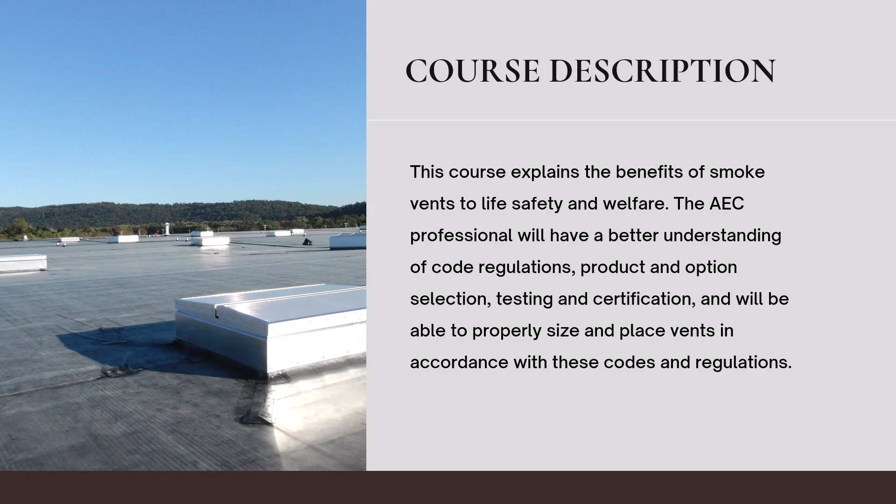The intent of this course is to explain the benefits of smoke vent design and life safety. Upon completion of this course, the designer will have a better understanding of the code regulations for life safety and will be able to properly size and place vents in accordance with codes. There are 5 learning objectives for this course. The first will be to be able to describe smoke venting application and why it's important to life safety. The second, we will illustrate smoke vent fundamentals, including the opening and closing options.

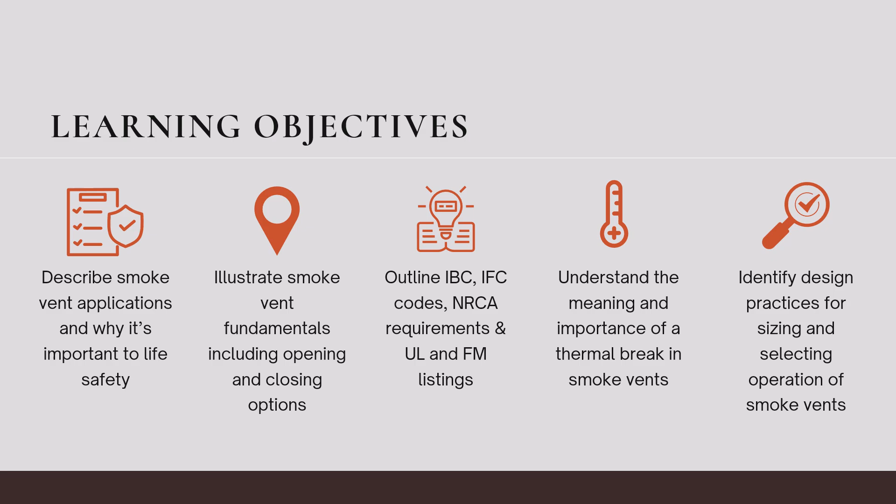Number 3, we'll outline IBC, IFC codes, as well as NRCA requirements and UL and FM listings. Number 4 will help you to understand the meaning and importance of a thermal break in a smoke vent. And lastly, we'll identify design practices for sizing and selecting operation of smoke vents.

So with that, let's start with section 1. In section 1, we're going to describe smoke vent applications and why it's important to life safety. Smoke vents are designed to open automatically to provide emergency smoke, heat, and gas ventilation from a burning building. Smoke vents save lives. The removal of smoke, heat, and toxic gases are critical to allow more time and improved visibility for occupants to exit a building.

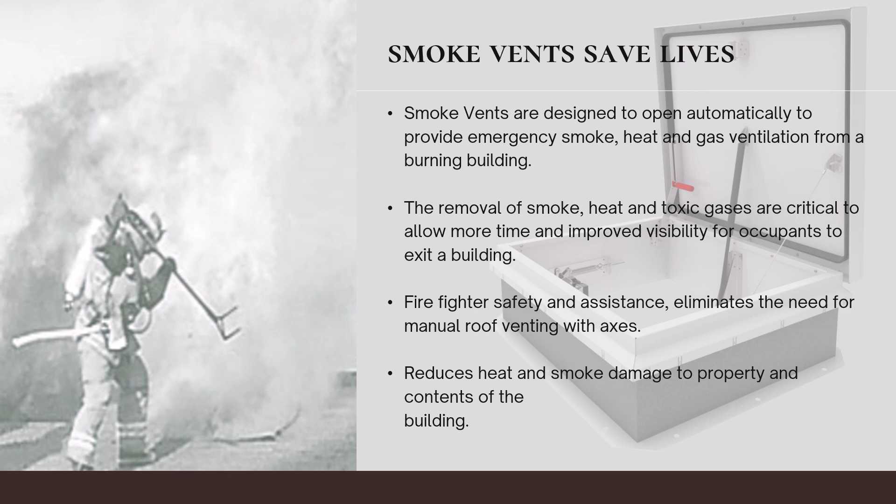Smoke vents are designed to open automatically when a fire is detected, allowing the smoke to escape from the building. This helps maintain visibility, making it easier for occupants to evacuate and for firefighters to access that building. Smoke vents can also be triggered by smoke detectors or fire alarms, so you can connect a relay to them.

Automatic sprinkler systems activate when they detect heat from a fire. They release water to control or extinguish the fire, reducing the spread of flames and limiting damage. The water spray also helps to cool the smoke, making it less dense and toxic. When both systems are in place, the sprinklers work to control the fire and reduce smoke production, while the smoke vents help to remove the smoke that is generated. This combination improves visibility and air quality, aiding in the safe evacuation and the firefighting efforts.

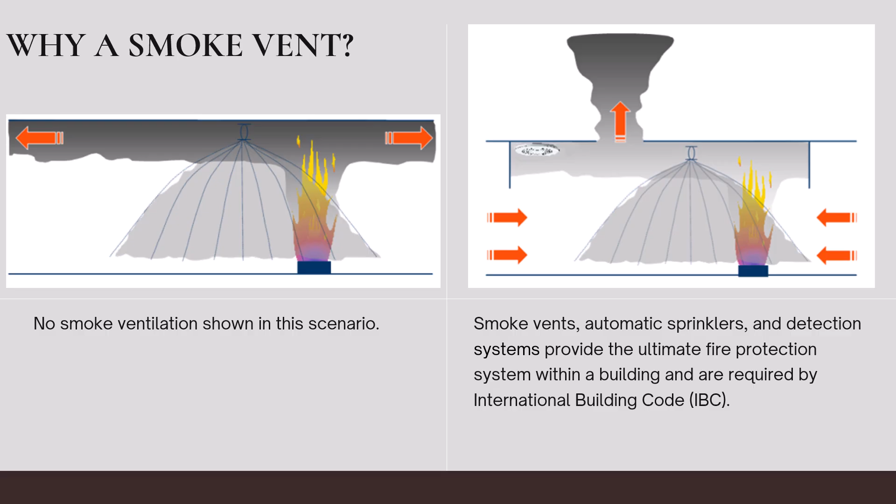It's important that these systems are properly coordinated. For example, smoke vents should not open too early, as this could interfere with the sprinkler system's effectiveness by allowing too much air into the building, which could in turn feed the fire. The following video shows an actual fire in a school where smoke vents were used.

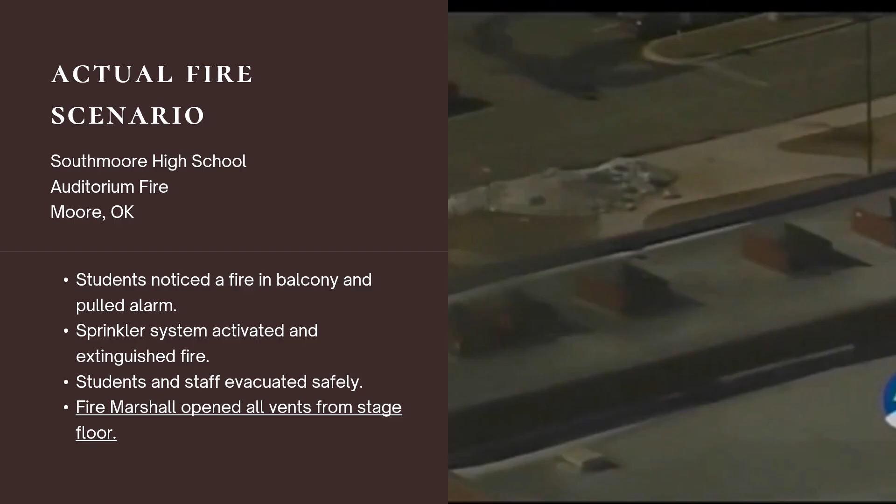Also right now, investigators are trying to figure out what sparked a fire. This is out of a metro school. This is late breaking news we're updating for you right now. Sky 5 over the scene at Southmoore High School. Firefighters say the fire started in the balcony of the auditorium. They don't know how it started. Students were evacuated, then sent home for the day. The good news is we can tell you no reports of any injuries. This morning.

So basically what happened here was that students noticed a fire in the balcony and pulled the fire alarm. The sprinkler system activated and extinguished the fire. The staff were evacuated safely. This happened in the city of Moore, and the fire marshal, Jeff Lindsay, opened the smoke vents manually from the stage floor, thus allowing the heat and gases to escape the building, keeping people from getting injured and damaging more of the school.

He commented, in such a large open space, it would have been better to have more smoke vents in other areas besides just above the stage. And without smoke vents, they could not have gotten the smoke out as fast as they did. They would have had to wait until the smoke cooled and dropped to push it out with fans, which would have caused more damage to the school. This was from Southmoore High School auditorium in Oklahoma.

Smoke venting systems are critical components of building safety infrastructure designed to mitigate the spread of smoke in the event of a fire. These systems are specifically engineered to manage smoke and heat accumulation within enclosed spaces, such as large commercial buildings, warehouses, shopping centers, and industrial facilities.

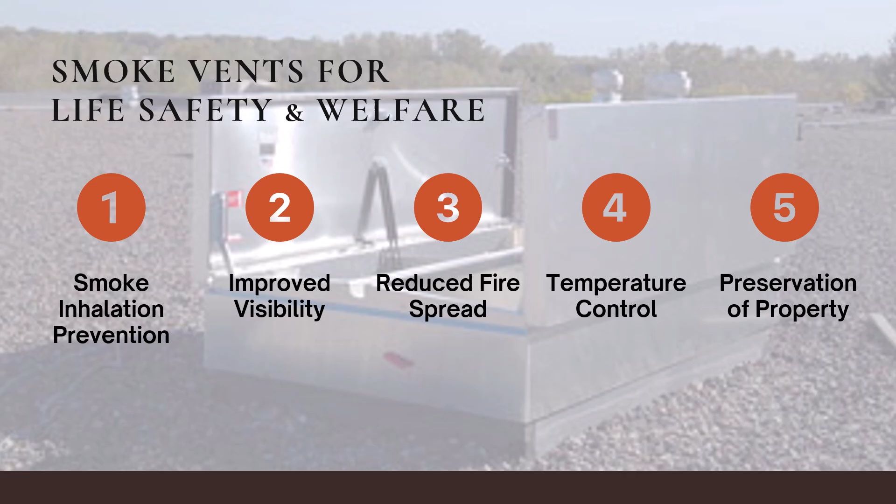We'll go through the 5 reasons why smoke venting is crucial for life safety. Number 1, smoke inhalation prevention. Number 2, improved visibility. Number 3, reduced fire spread. Number 4, temperature control. And number 5, the preservation of property.

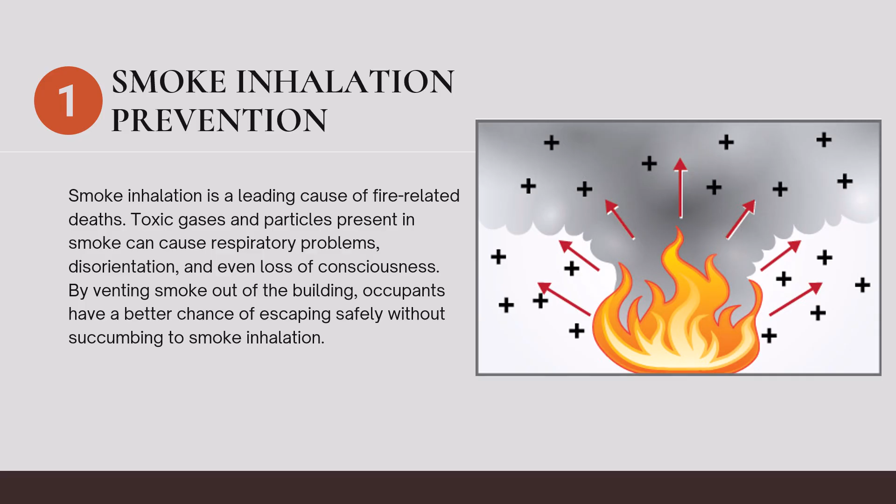The first reason for smoke vents is smoke inhalation prevention. Smoke inhalation is a leading cause of fire-related deaths. Toxic gases and particles present in smoke can cause respiratory problems, disorientation, and even loss of consciousness. By venting smoke out of the building, occupants have a better chance of escaping without succumbing to that smoke inhalation.

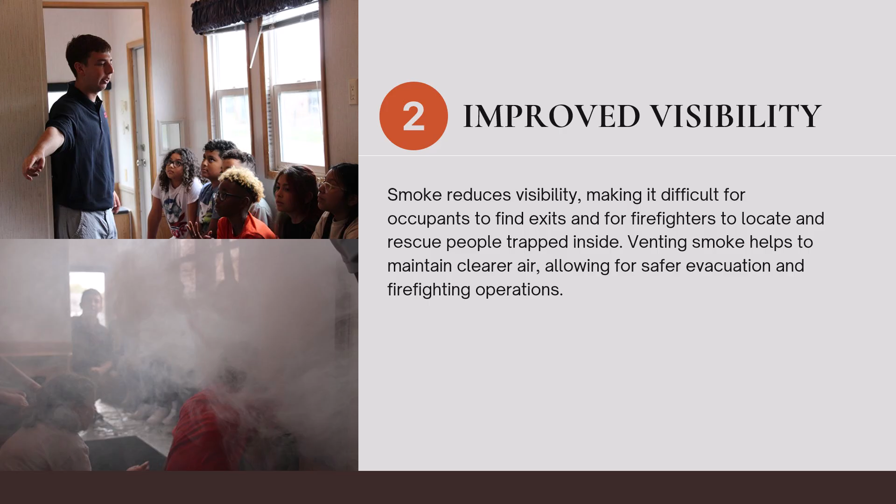The second reason for smoke venting is improved visibility. The image on your screen illustrates well how smoke significantly reduces visibility in a smoke-filled room, making it difficult for occupants to find exits and for firefighters to locate and rescue people trapped inside. Venting smoke helps to maintain clearer air, allowing for safer evacuation and firefighting operations.

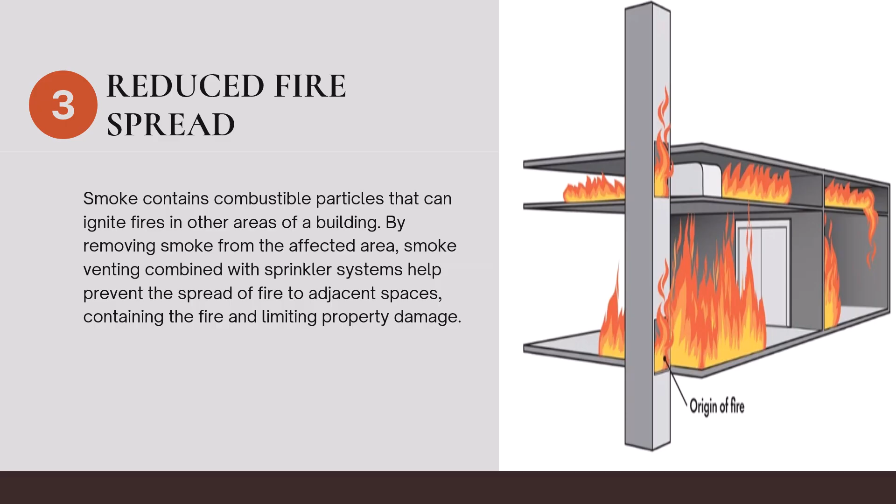The third reason for smoke venting is reduced fire spread. Smoke contains combustible particles that can ignite fires in other areas of the building. By removing the smoke from the affected area, smoke venting combined with sprinkler systems help prevent the spread of fire to adjacent spaces, containing the fire and limiting property damage.

The fourth reason for smoke venting is temperature control. Smoke venting systems not only remove smoke, but also help control the buildup of heat within a structure. Excessive heat can compromise the structural integrity of the building and pose a threat to occupants. Venting smoke helps dissipate heat, reducing the risk of structural collapse.

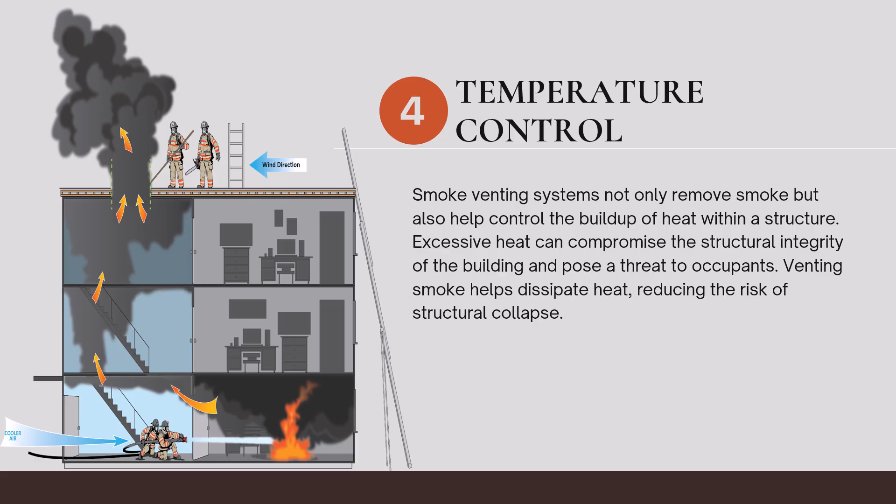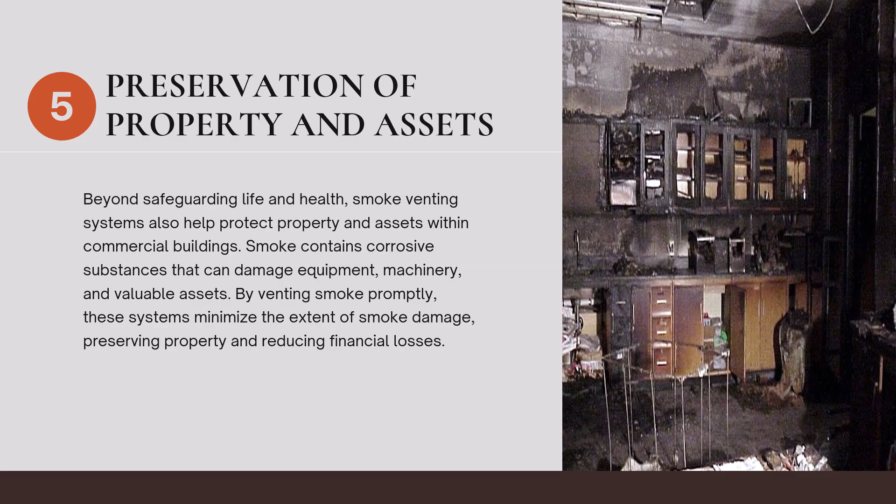Smoke contains corrosive substances that can damage equipment, machinery, and other valuable assets. By venting smoke promptly, these systems minimize the extent of smoke damage, preserving property and reducing financial loss.

So in summary of section 1, smoke vents are designed to open automatically to provide emergency smoke, heat, and gas ventilation from burning buildings. Smoke vents save lives. The removal of smoke, heat, and toxic gases are critical to allow more time and improve visibility for occupants to exit a building. In addition, firefighter safety and assistance are improved as the smoke vent eliminates the need for manual roof venting with axes, and it also reduces heat and smoke damage to property and contents of the building.

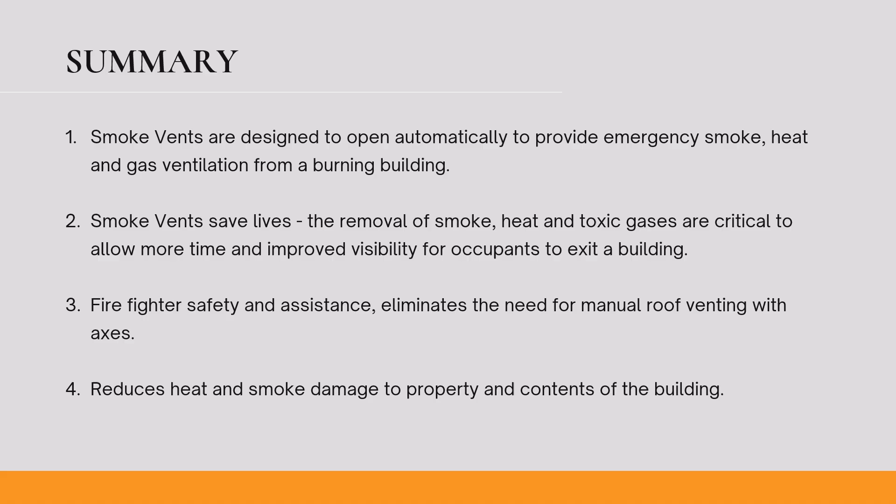Moving on to section 2, we're going to talk all about smoke vents and the fundamentals. So what is involved with smoke vents? What are the piece parts? How do they work, etc. So let's start with smoke vent fundamentals, basically what's common on typical smoke vents.

Smoke vents are commonly constructed of steel, aluminum, or a combination of both. Finishes for steel vents can be a baked enamel, a primer, or a powder coat. And for aluminum, you could get mill finish aluminum, anodized finishes, and there's also Trinar, Kynar type finishes that can be added to smoke vents.

The standard curb height on a smoke vent is 12 inches so that you can flash it up alongside of the curb and tuck the roofing up underneath that cap flashing. And although 12 inches is the standard, you can get curb heights anywhere between 6 inches and up to 48 inches. Curbs are also insulated, and insulation can vary from manufacturer to manufacturer, but typical insulation on curbs and covers would be polyiso, polystyrene, and mineral wool, just to name a few.

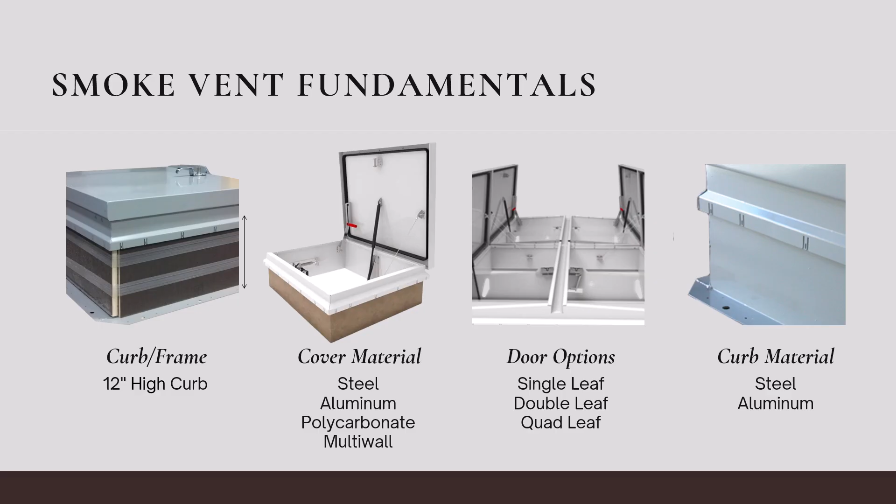Also, one last thing to add is door options. So a smoke vent, kind of like a roof hatch, you can get in a single leaf or a double leaf, but you can also get smoke vents for much larger applications in a quad leaf type system, as you see here on the third diagram. Basically, it's 2 vents with 4 doors inside of one singular frame.

When designing smoke vents, the most important question that needs to be answered is how is it going to open and how will it close? This screen that we're looking at now is going to be all about how they open.

So smoke vents are designed to open automatically when the fusible link reaches a set temperature of 165 degrees. And it can be as high as 450 degrees, and it's often coordinated with sprinkler requirements. You can see the link here on the far left part of your screen. Simply, it melts out at 165 degrees. The smoke vents are spring loaded and they pop open.

By default, smoke vents are fitted with manual pull cables inside and outside as well, so that they can be tested and manually opened. And then lastly, there are electrical options to open smoke vents. There is a video here.

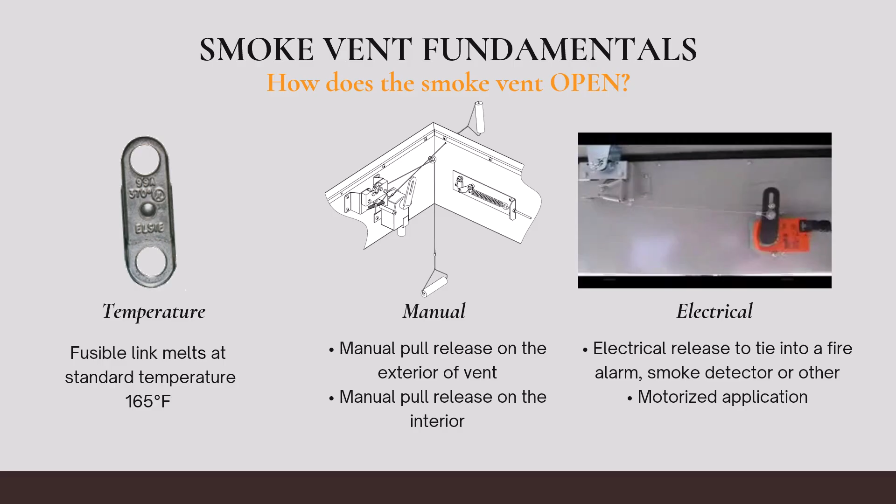I'm not going to play the video, but it shows a Belimo actuator tied to a fire alarm system that signals when the door should open up. So basically, if the alarm goes off, it triggers or relays to that Belimo. The Belimo then triggers the latch to open and pop open.

So for starters, with smoke vent fundamentals, the components are similar to, say, a roof hatch, but they perform in different ways. A roof hatch is meant for egress, and a smoke vent is meant for venting. The natural state of a smoke vent is closed, and they are typically only opened to vent a space.

On a smoke vent, you'll have an interior and exterior manual release latch, which is required so the hatch can be activated from the roof if needed. In addition, there's a fusible link with a predetermined meltout temperature that will automatically cause the vent to open when that temperature is reached.

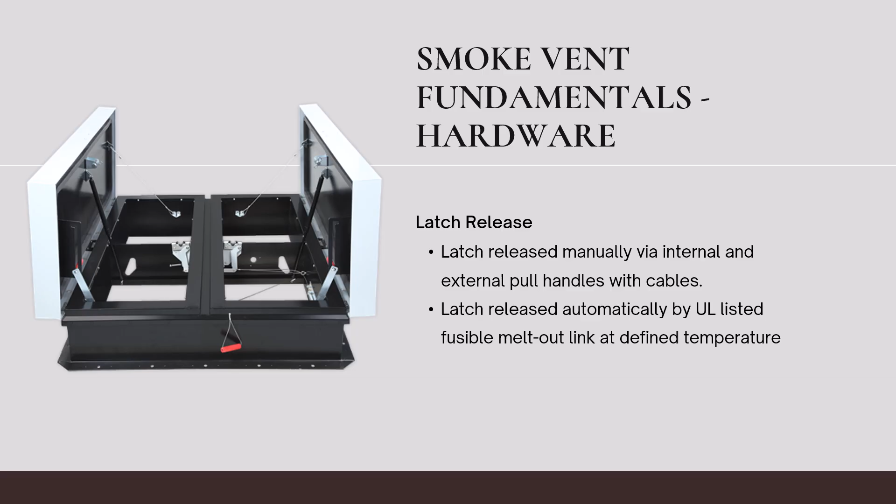So now that we know how a smoke vent opens, how does it close? First off, smoke vents are not easy to close. That natural position is open. They're spring loaded. Those spring forces want to keep the doors open. And there's enough opening force by code to lift 10 pounds per square foot against the theoretical wind or snow load.

That might not sound like a lot, but in a standard 4x8 configuration, that's 4 foot by 8 foot, which is kind of your standard smoke vent, the closing force is 320 pounds, or about 160 pounds per door in a double door design. And you'll need that same 160 pounds of force to close the door.

Options for closing the door include manually from the rooftop. This may take a couple of strong people to put their weight on the unit until it latches. A second option is a manual winch. You can see that here on your screen. The winch is an option frequently used in theater applications where they are rigged down to the stage floor area, where one can crank the winch to close the doors.

Additional options include motorized controls. You see the linear actuator up above. They include opening, closing, push buttons, as well as electrical relay ties into the fire alarm system. The code on smoke vents also requires that a dampener be in place to slow the opening of the doors. Without dampeners, those doors would open fast with really deadly force. They're super spring loaded, so they pop open really fast. The dampeners help to slow that down.

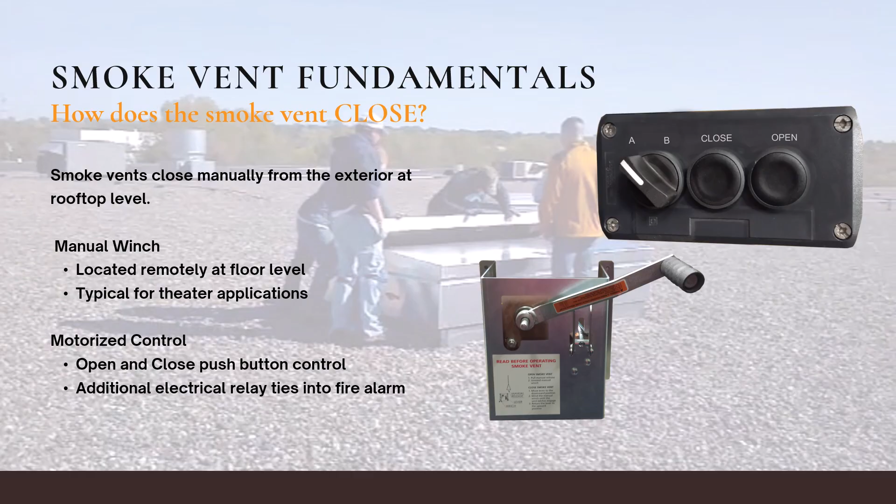And lastly, units have been tested independently, but they need to be tested as a system, a working system, to obtain that UL and FM listing. We talked about the opening and closing of smoke vents, and these are just some of the ways that they can open and close. For instance, we talked about the fusible link. The fusible link melts out, and then it pops the vent open when it hits a certain degree, so you can get links that are 165 degrees all the way up to 450 degrees Fahrenheit.

There's a pneumatic actuator that can help to open the smoke vent. There's also an electrical Belimo, which opens the smoke vent. There's a relay that you can tie into the fire alarm system so they talk together. You've also got manual pull handles on both the inside and the outside, so that they can be tested, and if one doesn't open up, a firefighter could be up on the roof and manually pull that and open it to vent the building.

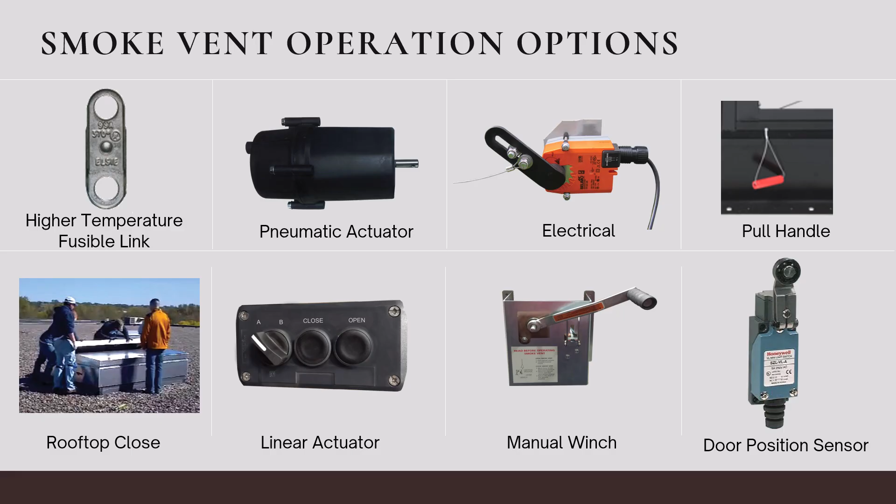To close it, you've got rooftop options, such as these gentlemen up there trying to close the roof hatch. You've also got linear actuators that do the opening and closing. You've got the manual winch, which can crank it down and close it once it's open. And lastly, there is what's called a door position sensor, which is a security feature which will link back to the security controls and will show when that vent is closed or possibly open.

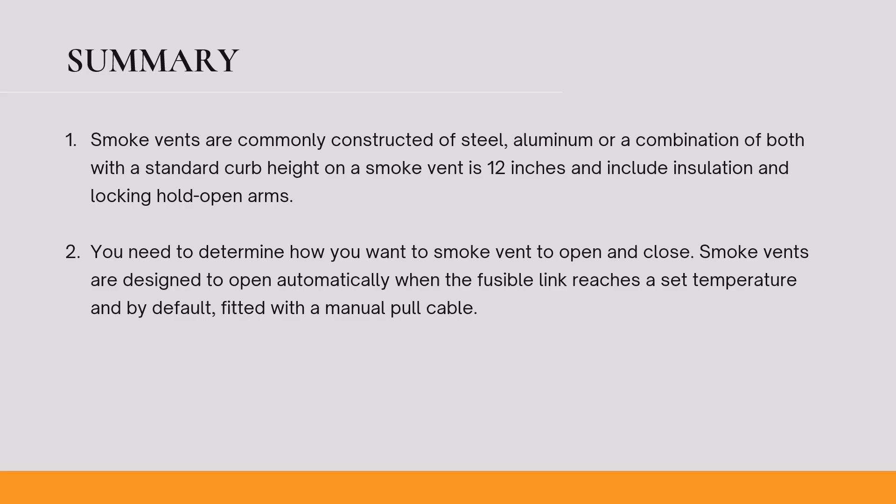In summary of the fundamentals, smoke vents are commonly constructed of steel, aluminum, or a combination of both, with the standard curb height, which is typically 12 inches and includes insulation and locking hold open arms. And number 2, you need to determine how you want the smoke vent to open and close. Very important questions. Smoke vents are designed to open automatically when the fusible link reaches a set temperature, and by default, they are fitted with manual pull cables, both inside and out.

Section 3, smoke vent codes and compliance. In this section, we're going to talk all about codes and smoke vents. NFPA 101 is also known as the Life Safety Code, which addresses smoke vents primarily through requirements related to smoke control systems and fire protection features. Here are some key points of NFPA 101.

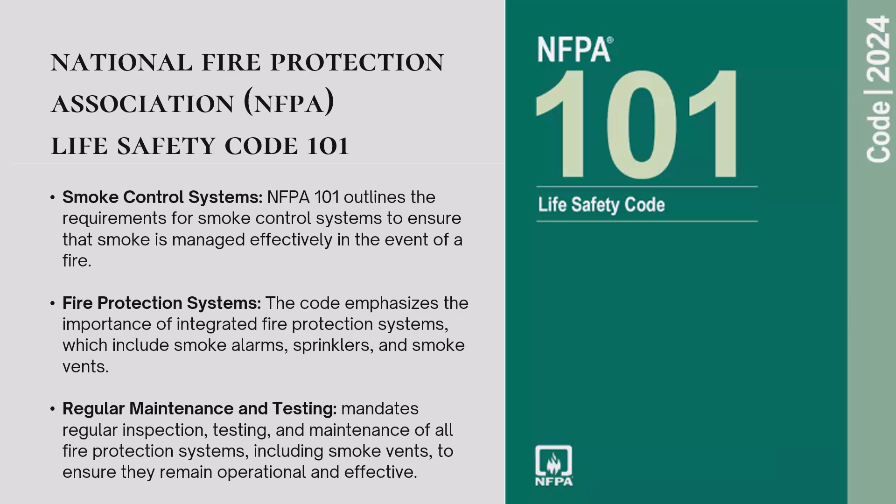Next, we'll review more NFPA code, code 204. NFPA code 204 is a standard for smoke and heat venting. It has a couple sections: design and installation, inspection and maintenance, and manual and automatic operation. Within the design and installation, these systems are crucial for the emergency venting of combustion products during a fire, ensuring the safety of occupants and facilitating firefighting efforts.

And when it comes to inspection and maintenance, this includes annual inspections to ensure all components, such as fusible links, manual release devices, and mechanical parts are functioning correctly. Proper documentation and reporting of these inspections are also required. And then lastly, for manual and automatic operation, smoke vents must be capable of opening automatically at a predetermined temperature. They should also have a manual pull cable for activation by personnel during an emergency.

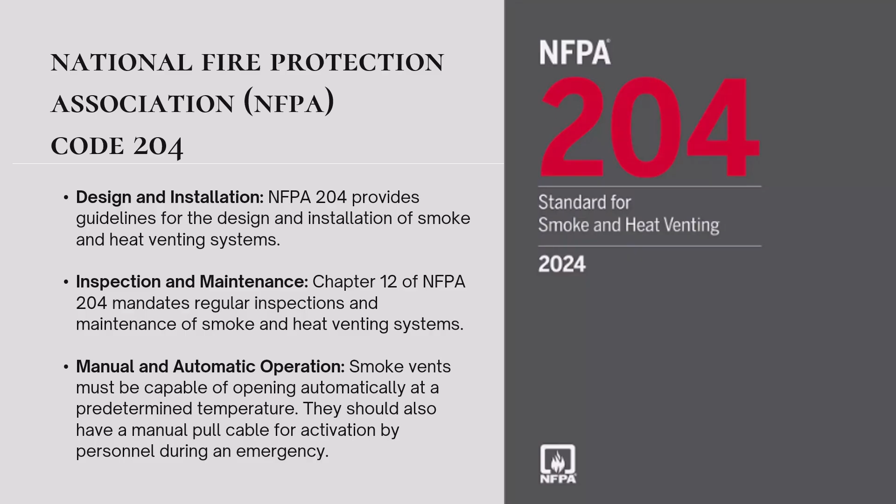And then lastly, you've got NFPA 92, which outlines the process for designing various smoke control systems. While it doesn't dictate when a smoke control system is required, it does specify how to design such a system. For instance, it talks about basic requirements for smoke vents, and it says, while NFPA 92 does not focus exclusively on rooftop smoke vents, it does address overall system requirements.

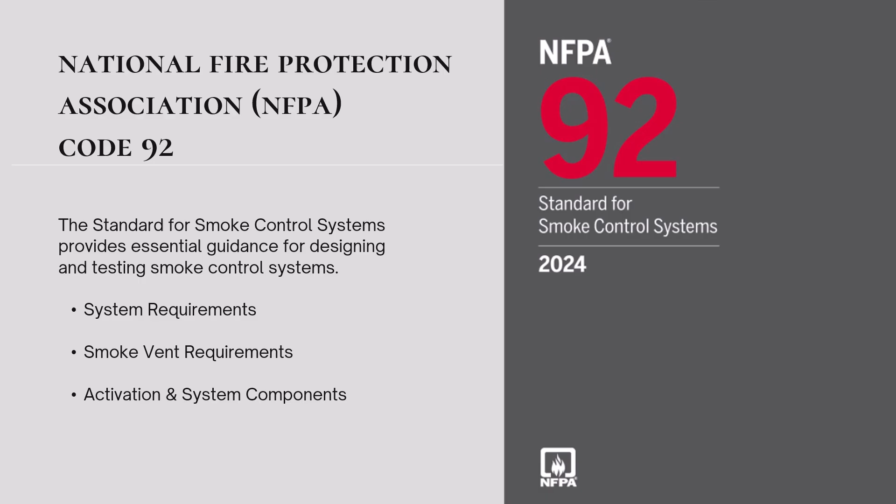When it comes to activation and system components, NFPA 92 emphasizes automatic activation of smoke control systems. Detection devices such as smoke detectors play a critical role in this process. These devices send signals to control panels, which then activate or shut down various components of the smoke control system. I recommend always consulting the full NFPA 92 code book for projects requiring smoke vents.

Smoke vents are required by the International Building Code, IBC of 2024, and they are required in sections 410, 910, and 3004. Section 410 is for stages, platforms, and technical production areas such as theaters, performing arts centers, and auditoriums. Section 910 is smoke vents for factories or storage warehouses, and Section 3004 for hoistway venting, which is found in elevator shafts. Also, local state jurisdictions adopt these codes or variants of these minimum requirements, so you always want to check with your local jurisdiction.

So let's start with Section 410 for stages, platforms, and technical production areas. It says in Section 410.2.7 for stage ventilation that emergency ventilation shall be provided for stages larger than 1,000 square feet in floor area or with a stage height greater than 50 feet.

Also, if you move on to Section 410.2.7.1 for roof vents, it says 2 or more vents constructed to open automatically by approved heat-activated devices with an aggregate clear opening area of not less than 5% of the area of the stage shall be located near the center and above the highest part of the stage area, and the vents shall be labeled.

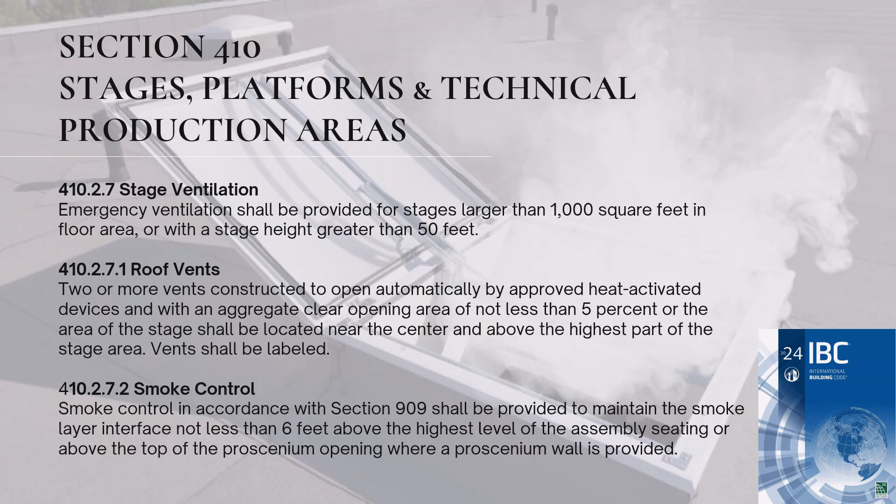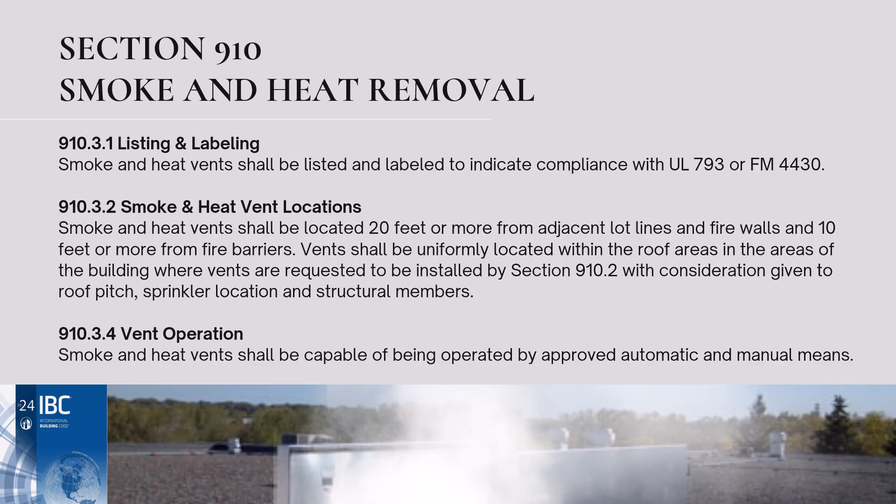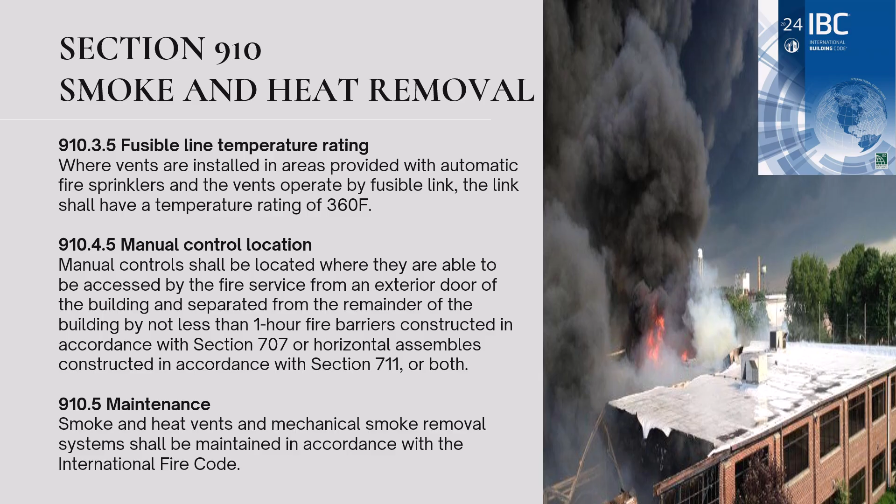And last of all, when it comes to section 910, it has very specific requirements where smoke vents are mandated. Section 910 covers the factory F1 and S1 occupancy types. Any single-story building greater than 50,000 square feet requires a 1 to 100 vent-to-floor ratio. That is, they want 1 square foot of venting for every 100 square feet of floor area. In addition, the IBC requires smoke vents to be UL 793 listed.

F1 type buildings are factory, moderate hazard. The building occupancy is used to manufacture things like vehicles, manufacturing like lithium batteries, whereas S1, storage moderate hazard, is the building occupancy used for storage of very burnable things like bags, books, clothing, and so on.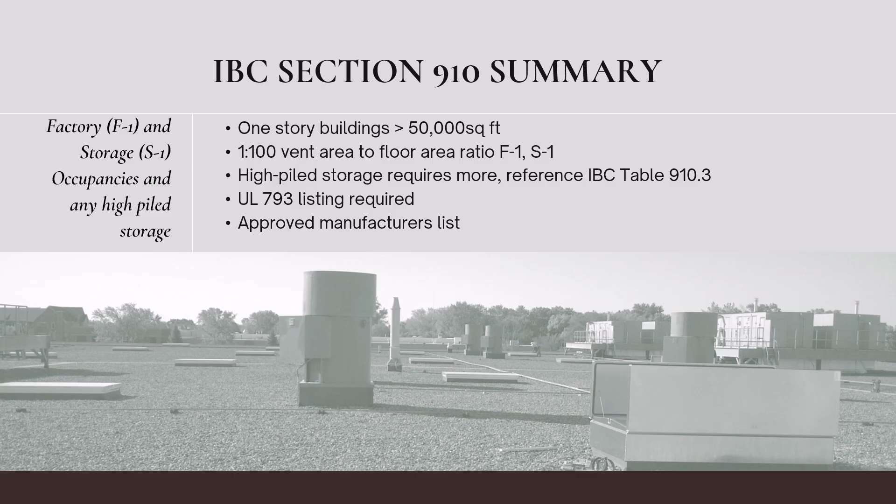To close out this section, let's discuss smoke vent product compliance required in code. These compliances are UL listed and FM approved. So what are the requirements of UL 793 to be specific when it comes to smoke vents? When they test these, they go through 250 cycle tests where they open and close them to make sure that they operate correctly throughout those cycles of tests. They operate with UL 33 listed heat responsive devices or fusible links in the range of 160 degrees Fahrenheit to 520 degrees Fahrenheit. They need to operate manually from inside or outside of the building, and that's the pull handles we talked about.

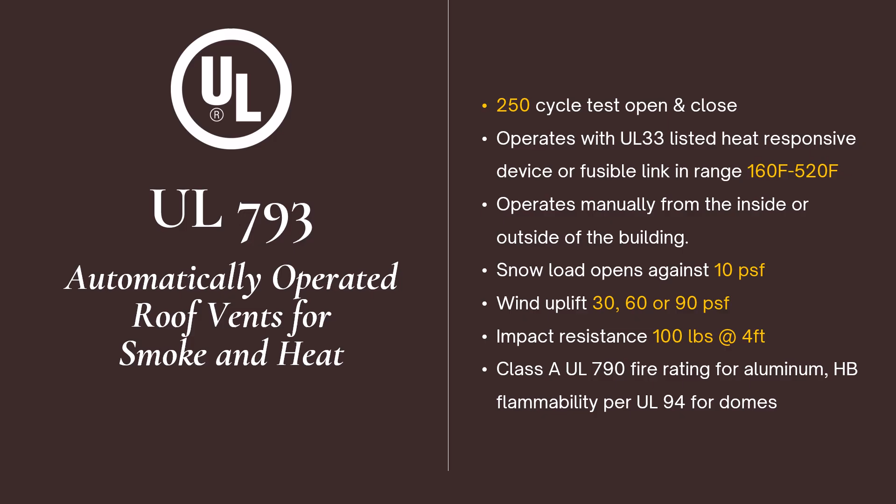They need to open against a snow load of 10 psf per door. They need to have a wind uplift rating of 30, 60, or 90 psf. They need to have impact resistance testing at 100 pounds at 4 feet. And lastly, they have to have a Class A UL 790 fire rating for aluminum and HB flammability per UL 94 for domes.

FM requires a little bit different testing, but some of it's similar. So the testing is 60 cycles testing opening and closing, which is a lot less than the 250 per UL. FM operates with a 360 degree Fahrenheit minimum rated heat sensing device, so as not to activate before the sprinkler, so this is really in factories. It needs to operate manually from the floor level.

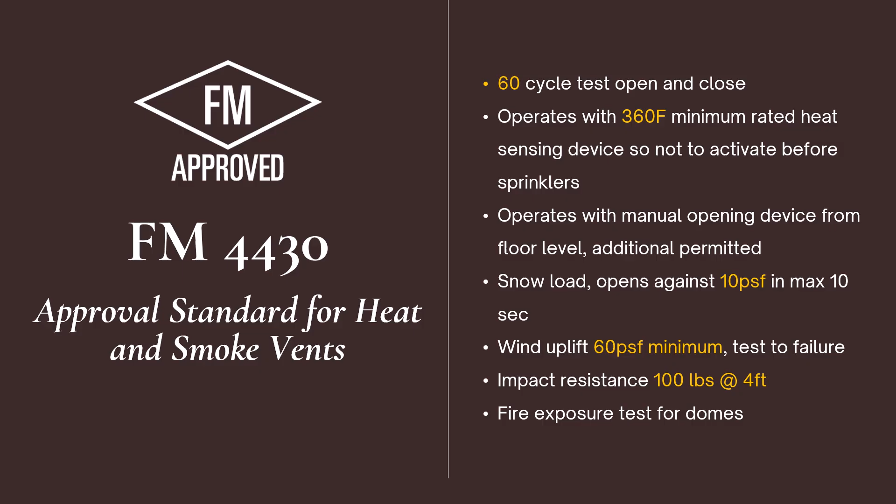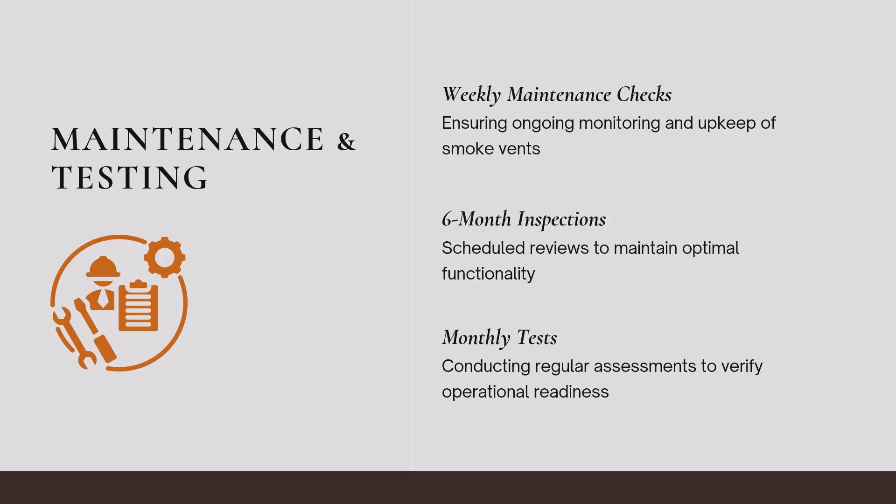The snow load, again, is 10 PSF, but it also has to do it in 10 seconds. The wind uplift is 60 PSF minimum. Impact resistance is 100 pounds at 4 feet, similar to the other, and fire exposure tests need to be done for the domes. Finally, just a reminder that smoke vents are essential to protect life and the safety of building occupants, so make sure that they are maintained and tested on a regular schedule. That requires weekly maintenance checks, 6-month inspections, and monthly tests.

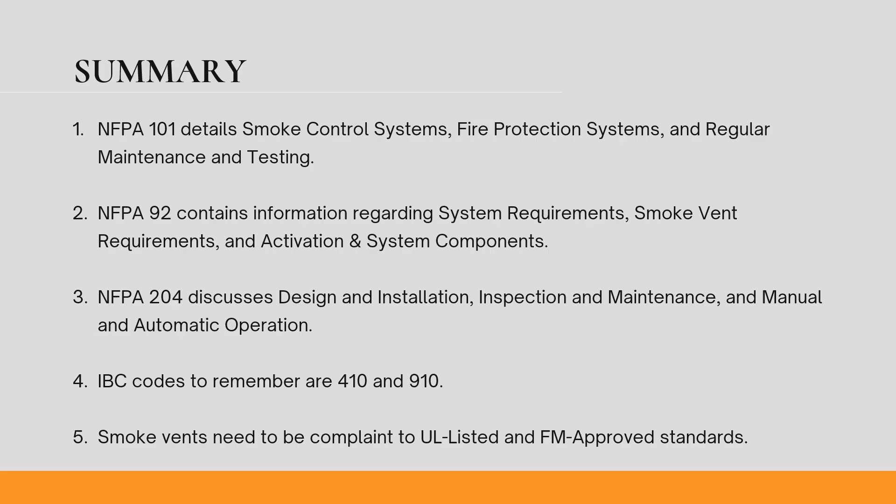In summary of that section, NFPA has requirements for smoke vents in section 92, section 101, and sections 204. IBC codes to remember are sections 410 and 910. And lastly, smoke vents need to be compliant to UL listing and FM approved standards.

Moving on to the next section, we'll be discussing how to choose the right smoke vent for your project. So for starters, what do we typically see for smoke vents on your standard F1 factory type buildings or S1 storage occupancy types? What we see is usually a standard 4-foot by 8-foot double door configured smoke vent. They usually have minimal components, real standard, with combined spring and dampers, and are UL 793 listed and labeled.

Also, we see them typically direct deck roof mounted or mounted on a curb built into the deck itself. Again, you can see a lineup of smoke vents, a bunch of 4x8s, all in a row to vent the building effectively.

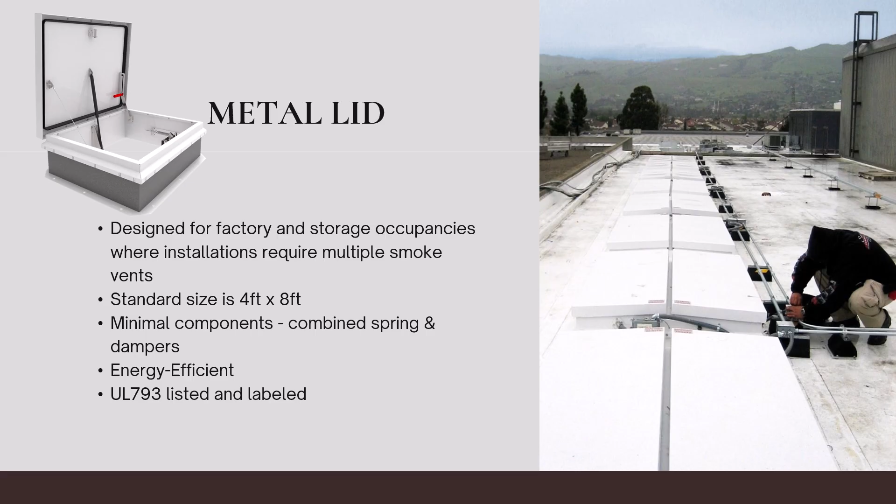On the screen, you see a project spotlight of a Disney laundry facility. This is an example of a large smoke vent. These are quad leaf smoke vents. Basically, that's 2 double leaf smoke vents in one frame. They did this because they needed a large amount of ventilation, and they chose the oversized units to minimize the number of cuts in the roof deck.

These also came with burglar bars because they didn't want the people to be able to use the manual pull on the roof to get in the building. There's a metal lid. It's motorized for opening and closing, and there is a custom curb on this particular smoke vent.

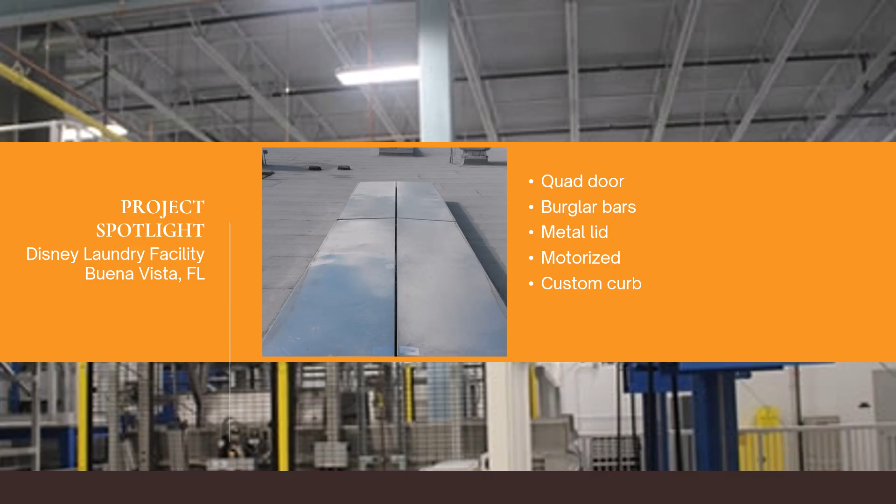There are also choices when it comes to smoke vent design. The industry standard, what we've seen so far on this course, is the hard lid units. But as the industry moves to more energy conservation, translucent smoke vents provide natural daylighting for the interior. You can specify polycarbonate domes or 3-wall, multi-wall polycarbonate covers in a variety of transparencies.

In addition, they carry the UL 793 listing as well as the UL 746C compliance with UV light exposure tests for polymeric materials. It's also important to note that OSHA treats translucent smoke vents like they do skylights, meaning they require fall protection so a person on the roof doesn't fall through the smoke vent.

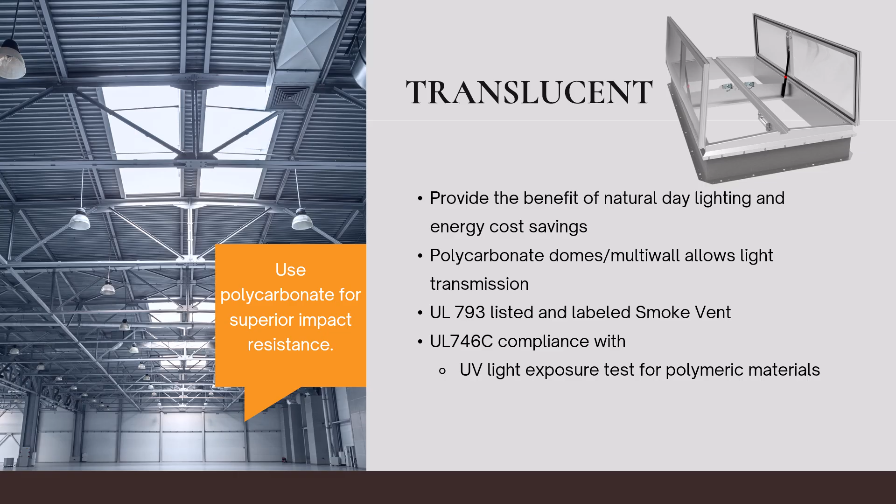Most manufacturers will offer fall protection mesh or a railing system, and a few smoke vent manufacturers will use translucent material like polycarbonate that passes the strict fall protection tests, so additional fall protection like mesh or a railing system is not necessary. There are also options for translucent smoke vents with an apron mount flange.

It's a real simple smoke vent. It's a product designed to look kind of like a skylight, and many big box stores use this product along with a row of skylights for a consistent look and smoke venting performance.

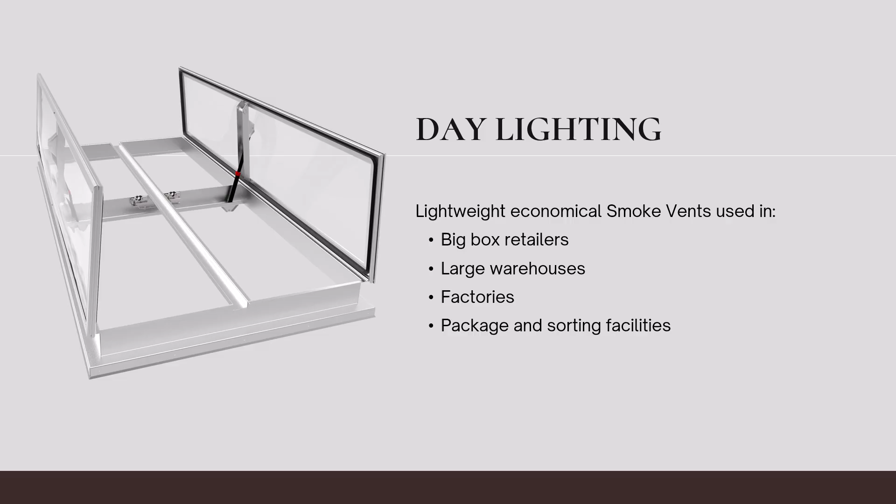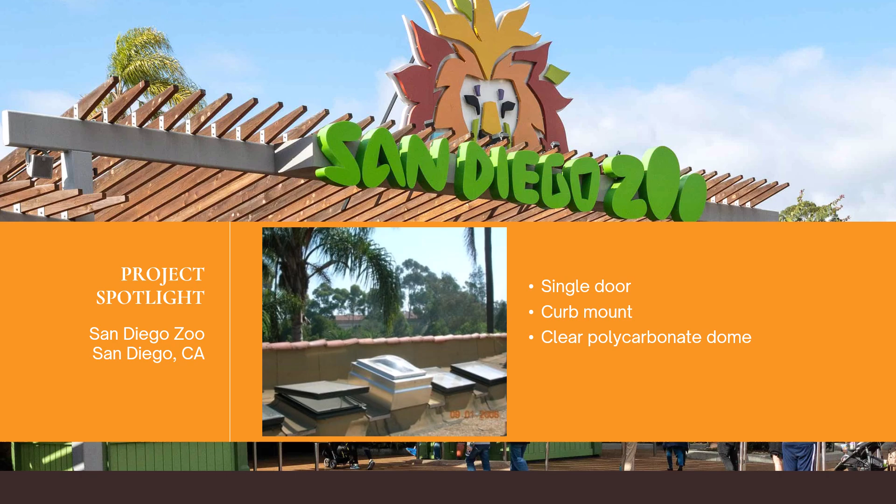Here's another interesting project spotlight coming from the San Diego Zoo. There are, as you can see, a bunch of smoke vent varieties in different shapes and forms. This project replaced the existing operable skylights with a combination of metal lid and sunlit smoke vents. The zoo officials wanted to reduce the amount of light the skylights were allowing into the building while providing options for ventilation. The various smoke vents provide much needed flexibility for the animal occupied spaces.

There are several options available for dome material on daylighting smoke vents. The most common is a clear single wall dome. It provides great light transmission but has a low R value. By doubling the dome, so a double dome configuration, you will increase the R value with a slight decrease in light transmission.

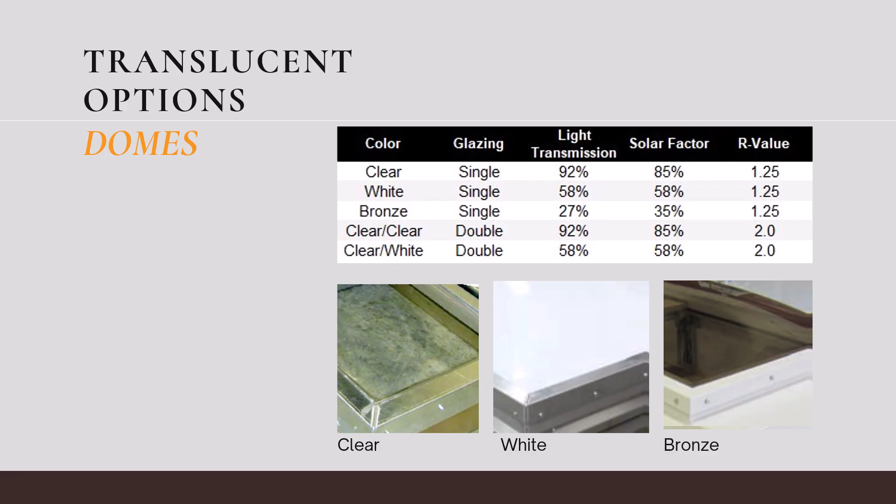Color options will also impact the transmission of light into the building, and you can see there are other color options such as clear, white, bronze, clear over clear, which is your double dome, or clear over white, which is also a double dome type option.

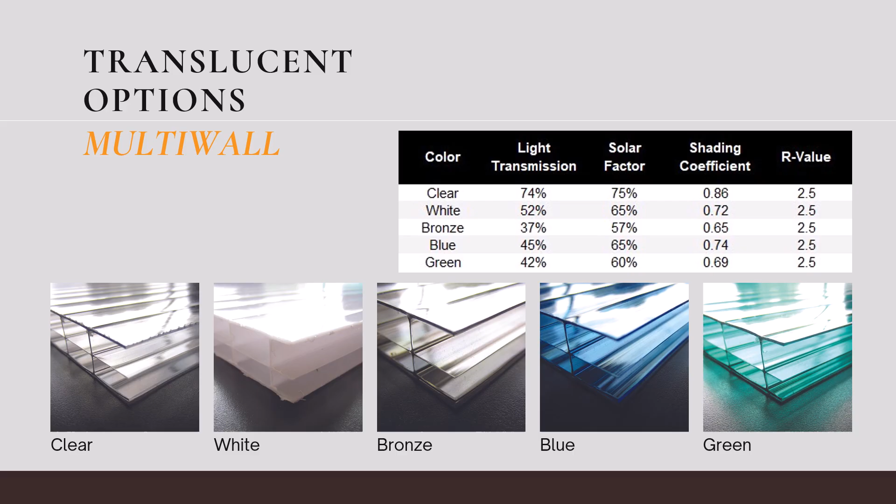There is another option for daylighting, which is instead of a dome, called a multi-wall. Multi-wall has an R value of 2.5. They come in a variety of colors with different light transmission and solar factors, which you can see on the screen. And you can compare them against the dome or the double dome in the previous screen.

Here's an example of an application at the Post Office Distribution Center in Waltham, Massachusetts. This is a retrofit translucent project spotlight. By replacing hard lid smoke vents with translucent lids, this postal building was significantly improved without re-roofing and with minimal impact from construction. Essentially, the hard lids on 41 smoke vents were removed and replaced with curb-mounted, domed and labeled smoke vents, providing natural daylight and energy savings.

This solution added a curb-mounted curb, a dome to the cover. Like I said, they're labeled smoke vents. These are easy to install. You didn't have to penetrate the roof at all. And now the new benefits are there's natural daylighting, there's energy savings. On the installation, time and labor savings were had based on not having to really mess with your roof and just replacing the smoke vent itself on top of an existing curb.

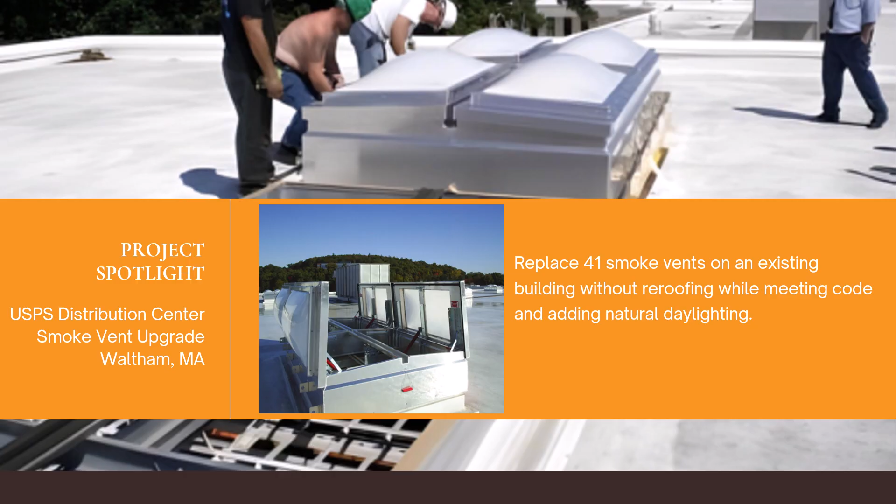So we've already talked about your big box facilities, your F1 and S1 factory applications. But there are also special considerations for smoke vents in theaters, and we already kind of touched on this per IBC section 410.2.7, which defines emergency ventilation for stages larger than 1,000 square foot in floor area with a stage height greater than 50 feet. Typically, the emergency pull handle is rigged down to the floor level, so the vent complies with the supplemental manual opening requirement per IBC. Also, the vents must be labeled UL 793 or FM 440, which are the industry standard vent labels.

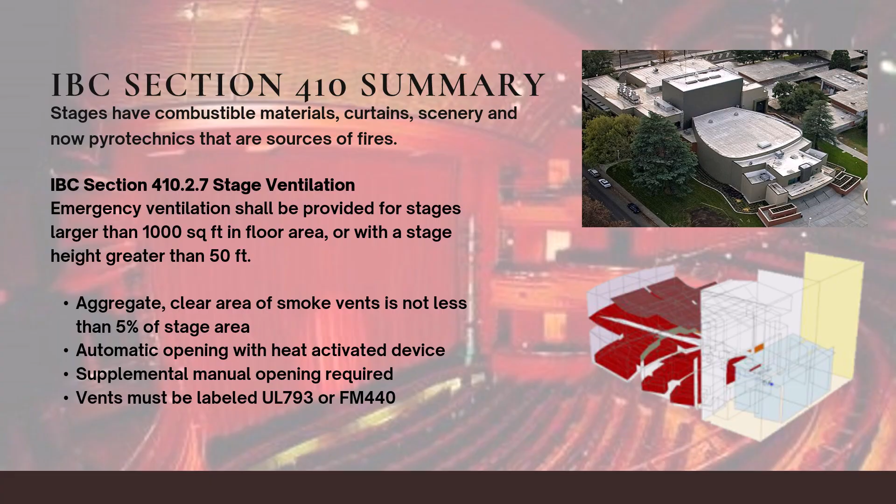With IBC section 410 requiring smoke vents in performance venues, the industry developed what's called the acoustical smoke vent. In real life, the acoustician works to design the perfect venue for sound, and then the fire marshal comes along and says, cut a hole in the roof to vent possible smoke. That's why the acoustical smoke vent was developed. Industry standard capability for smoke vents: they have an STC rating, and that STC rating usually is between 40 and 50. They also have OITC ratings, which are between 30 and 47.

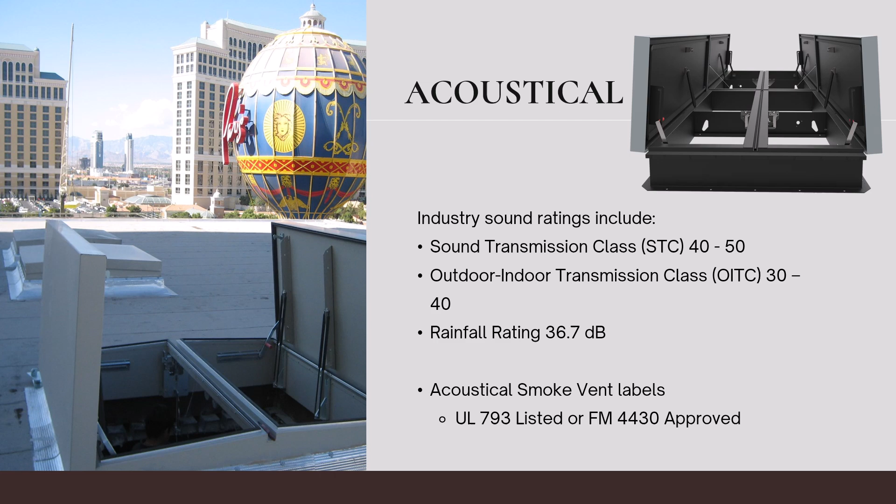Higher is better, so specifying a smoke vent with an STC rating of 50 maintains the specification coordination with the ceiling assembly or even surpasses the soundproofness of the ceiling assembly. One little note, the acoustical rated smoke vents are usually painted black on the interior, making them disappear into the ceiling of the theater space.

Now that we've talked about the STC rating and OITC sound rating, I think we need to talk about that a little further so that there's some understanding. The STC is the sound transmission class, which is a single number rating for assemblies and their ability to resist airborne sound transfer at frequencies between 125 and 4,000 hertz. So a low-pitched tuba would be about 25 hertz, where a high-pitched flute, you're talking about 2000 hertz, just so you have an understanding of the sounds.

Outdoor-indoor transmission class, which is the OITC, is a standard used for indicating the rate of transmission of sound between outdoor and indoor spaces. The OITC is weighted to lower frequencies at 80 hertz, which is like aircraft, train, or truck traffic. The idea is when you are in a performing art center, you want to hear the performance and not the outside noises. Acoustical smoke vents address this issue and carry the STC and OITC ratings.

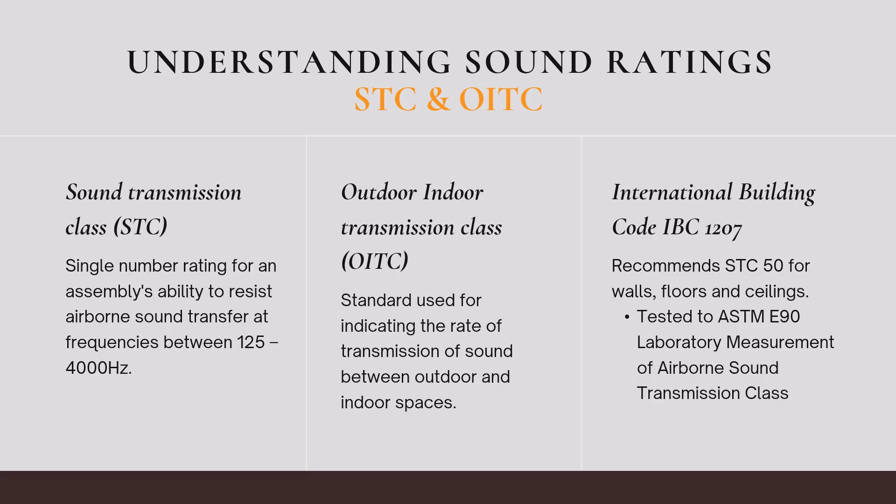International Building Code IBC 1207 recommends STC 50 for walls, floors, and ceilings. So specifying a smoke vent that meets the rating to maintain the specification coordination with the ceiling assembly is also something to think about. So far with sound ratings, we've talked about hertz as well as decibels. There is a rainfall rating, which goes on acoustical smoke vents typically, and that is measured by decibels, whereas the STC ratings and the OITC ratings have to do with hertz. So just a little definition of both of them.

Decibels and hertz measure different aspects of sound. Decibels measure the intensity or loudness of a sound, while hertz measures the frequency or pitch. A sound at 140 decibels, as you see on your screen, is extremely loud and often described as the threshold of pain. Examples include a jet engine at takeoff or a gunshot.

On the other hand, hertz measures how many times a sound wave cycles per second. For instance, a low-pitched sound like a bass drum might be around 60 hertz, while a high-pitched sound like a whistle could be around 10,000 hertz. So while 140 decibels indicates a very loud sound, the hertz would tell you whether that sound is high-pitched or low-pitched. They are complementary, but measure different properties of sound.

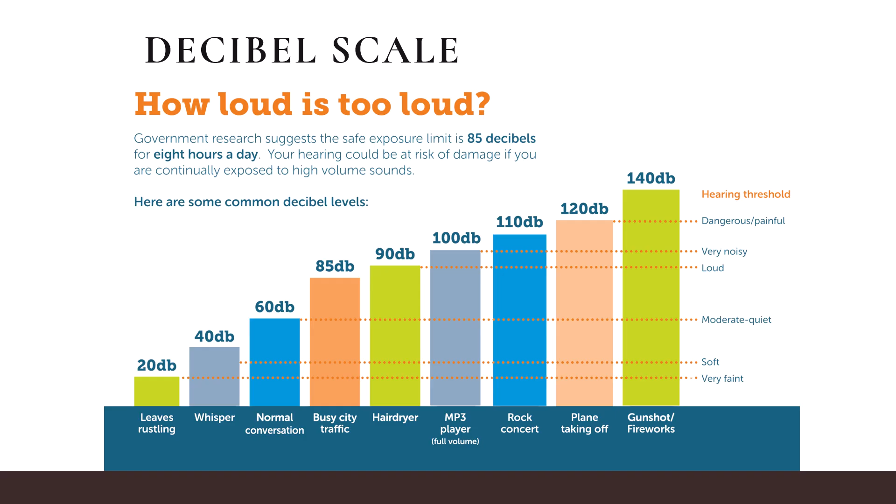Here's another project spotlight. This is an acoustical smoke vent project in Atlanta, Georgia. It's the Cobb Energy Performing Arts Center. It has an upper and lower deck and carries 2 levels of acoustical smoke vents for ultimate performance. These smoke vents include a manual winch operation, which is integrated with an electrical tie-in for smoke alarms, and requires coordination and collaboration with rigging and electrical and roofing trades during installation.

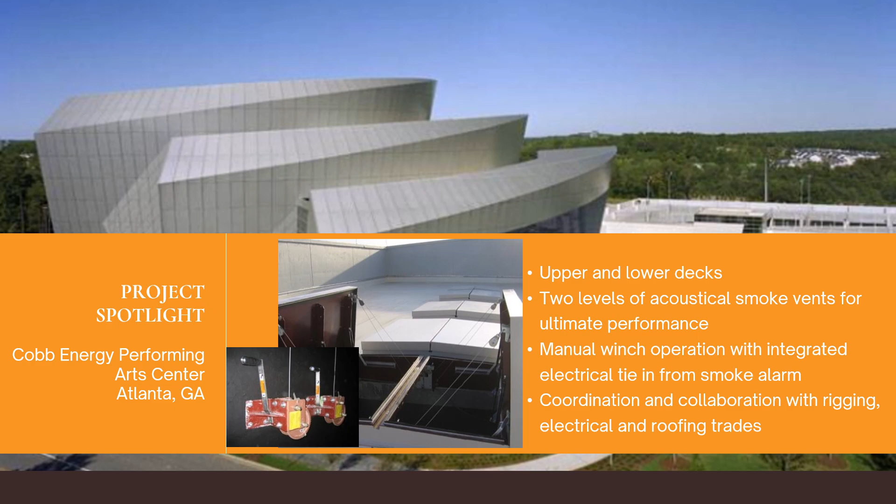You will notice the interior of the smoke vent is painted black, as I mentioned earlier, so when they are closed and the lights go out, the smoke vents virtually disappear into the ceiling. It is a consideration for specifying a smoke vent into a theater where they should not be seen. While many contractors will field paint the interior, they potentially damage links and moving parts like springs and dampeners. Field painting the smoke vents will typically void the UL listing, so in specifying a smoke vent for a theater application, require a black powder coat interior from the factory.

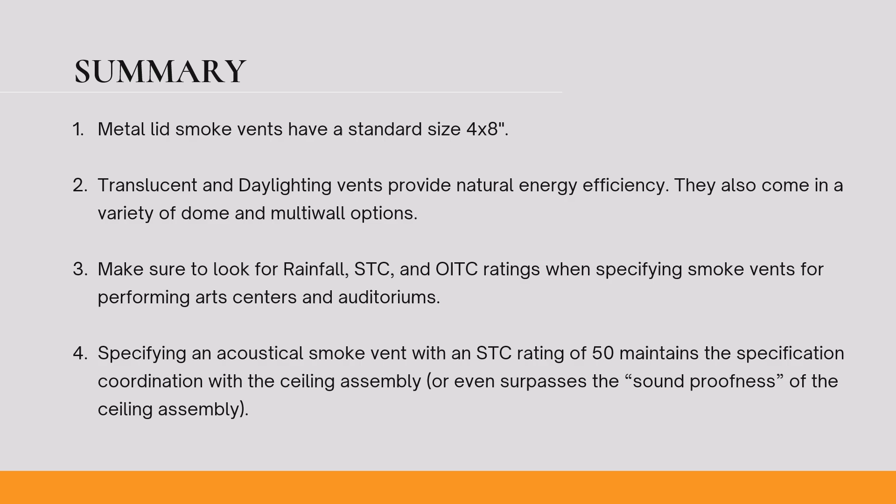So in summary of that section, typical standard smoke vents are usually a metal lid smoke vent in a 4 by 8 foot size. Translucent and daylighting vents are an option, and they provide natural energy efficiency, and they also come in a variety of dome or multi-wall options. Make sure to look for STC and OITC ratings when specifying smoke vents for performing arts centers and auditoriums. Specifying an acoustical smoke vent with an STC rating of 50 maintains the specification coordination with the ceiling assembly, or even surpasses the soundproofness of the ceiling assembly. Let's move on to the next section where we'll talk about thermally broken smoke vents.

In this next section, we'll talk about a newer innovation or technology in smoke vents, which is the thermally broken smoke vent. In regards to a thermally broken smoke vent, what is a thermal break? Basically, a thermal break refers to a design feature that creates a barrier to minimize heat transfer between interior and exterior components. Essentially, it keeps the interior temperature of a building consistent regardless of the weather outside.

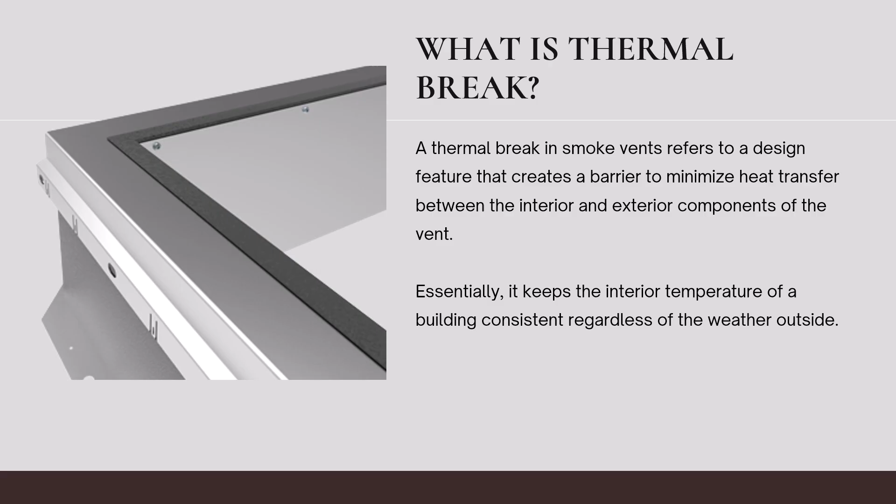So during the summer months, heat from an extremely hot roof wants to radiate through the smoke vent into the cooler building interior. While a standard smoke vent insulation helps to reduce this heat gain, the metal construction of the smoke vent itself facilitates the temperature transfer, which can lead to increased utility cost and condensation issues on the underside of the vent. In the winter time or in colder months, the same energy transfer principle results in heat loss from inside a building as well as increased energy expenses. The importance of a thermal break in a smoke vent lies in its ability to enhance the overall performance of the product. And we'll discuss the 3 reasons why it's significant in the next few slides.

As discussed, the thermal breaks in smoke vents minimize heat transfer between interior and the exterior of the building, reducing thermal bridging and heat loss. This not only improves energy efficiency, but it also helps in maintaining consistent indoor temperatures, which can be crucial in preventing the spread of fire. This improves the building's ability to contain the fire within the compartment of origin, limiting property damage and providing additional time for occupants to evacuate safely.

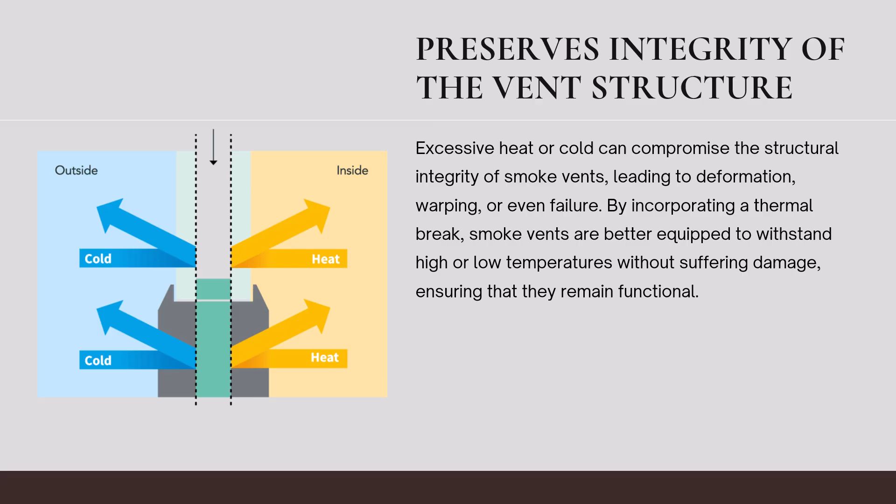Excessive heat or cold can compromise the structural integrity of smoke vents, leading to deformation, warping, or even failure. By incorporating a thermal break, smoke vents are better equipped to withstand high temperatures without suffering damage, ensuring they will remain functional and effective in facilitating smoke evacuation. Thermally broken vents will mitigate condensation in cold weather climates.

Thermally broken smoke vents are also designed with an element of low conductivity integrated between interior and exterior surfaces of the cover and the frame to reduce temperature transfer. As an added benefit, these same thermally broken components dampen vibration for improved acoustical performance against outside noise. By reducing unwanted heat transfer, particularly in regions with extreme climates, buildings can maintain more stable indoor temperatures and decrease the demand for heating or cooling, leading to potential energy savings over time.

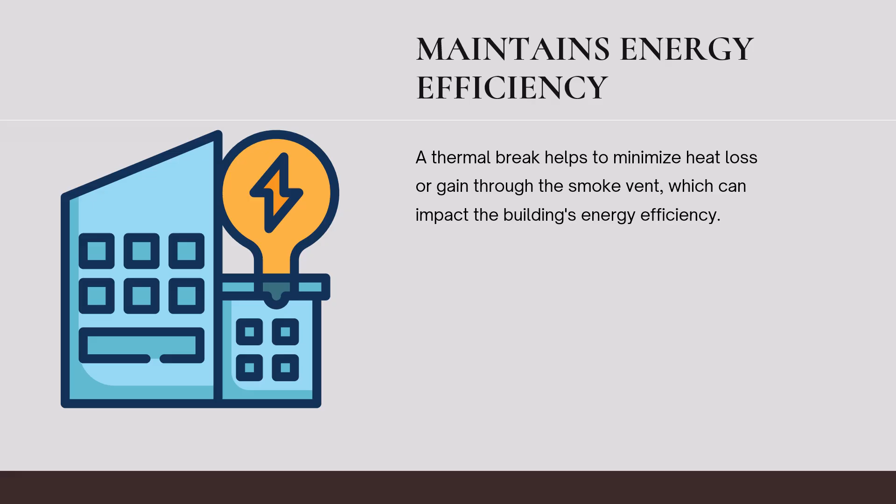Thermally broken smoke vents also have a higher R value. And R value refers to the specific level of thermal resistance provided by insulation materials used in construction. This designation indicates the thermal resistance value, which is a measure of how effectively the insulation material resists the flow of heat. Higher ratings signify insulation with a high level of thermal resistance.

Insulation typically consists of materials such as fiberglass, mineral wool, or foam board, which are designed to trap pockets of air within their structure. These air pockets inhibit the transfer of heat by conduction, convection, and radiation, helping to maintain more stable indoor temperatures and improve energy efficiency. Thermally broken smoke vents play a crucial role in enhancing the energy efficiency, comfort, and stability of buildings.

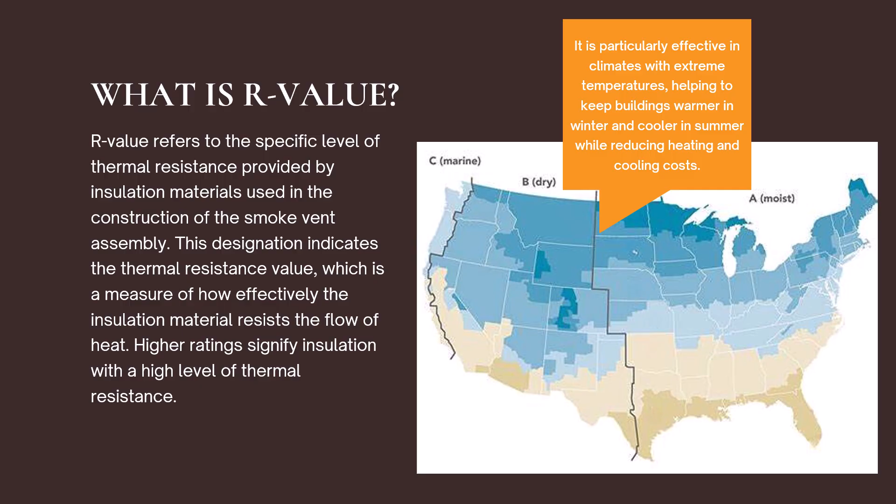So in summary of that last section, we learned what a thermal break in a smoke vent is. We learned that smoke vents with thermal breaks contribute to the overall fire resistance of a building by reducing the potential for heat penetration through structural openings. We talked about the fact that thermally broken smoke vents are more energy efficient, and we talked about R values, which refers to the specific level of thermal resistance provided by insulation materials used in the construction industry.

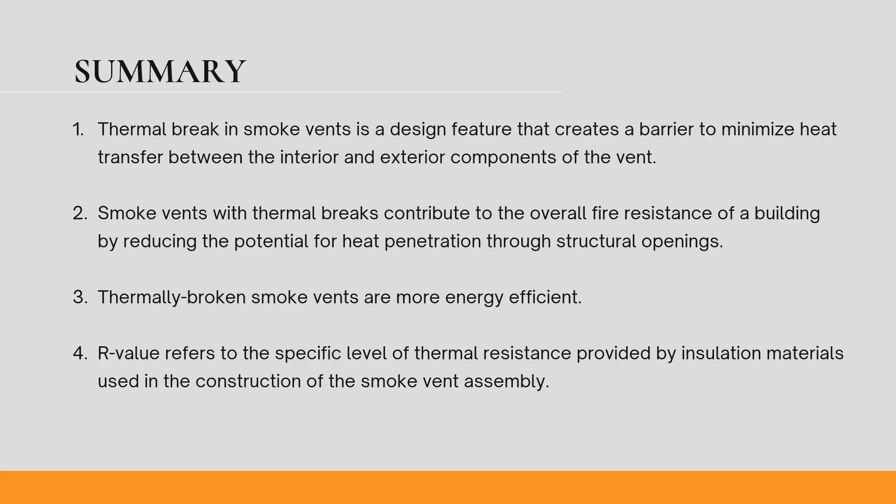Earlier on, we talked about the fundamentals of smoke vents, about codes, types of vents, and thermal breaks, which leads me to the last section, which just has to do with a few additional smoke vent options that are available. The first consideration one needs to think about with smoke vents is unwanted access. Smoke vents are an unsecured opening with both internal and external manual pulls.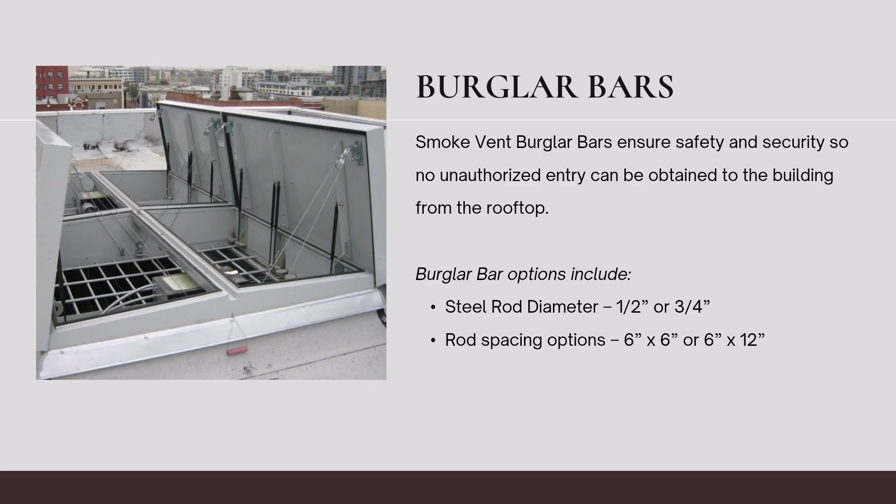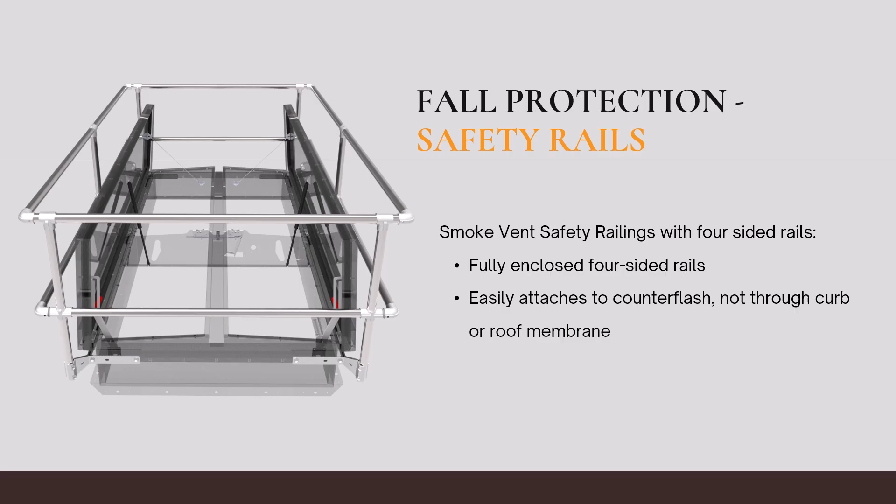Aside from restricting outside entry with burglar bars, something else to consider is fall protection. Once the vents are open, you essentially introduce a hole into the top of the roof, which somebody could fall down into. A couple different ways to implement fall protection for a smoke vent is the traditional 4-sided railing system, which you see here, or an interior 4-inch by 4-inch mesh system, which we'll review on the next slide.

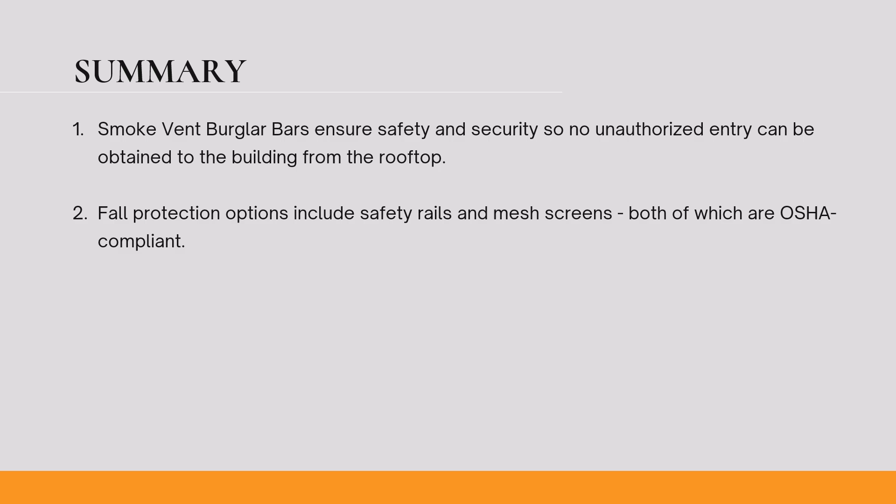In summary of this last section, smoke vent burglar bars ensure safety and security so no unauthorized entry can be obtained to the building from the rooftop, and fall protection options include things such as safety railings or mesh screens, both of which are OSHA compliant. And there you have it. That wraps up the course for today.

You've learned many course objectives, and you'll leave today with several key takeaways. First off, we talked about smoke vents and life safety. You should be able to describe smoke venting applications and understand its importance to health, welfare, and life safety of building occupants. We talked about the fundamentals of smoke vents. You should be able to illustrate the fundamentals of smoke vents and their opening and closing functions.

We talked about codes in depth. You should be comfortable with the building codes, requirements, and label certifications related to smoke vents. And lastly, we finished with product options, where you should understand the importance of things like a thermal break in a smoke vent. We talked about sizing, selecting the right smoke vents for the right application and the right products for your project. As you can see, there are many different options of smoke vents,

so I would say feel free to consult any of the companies that make smoke vents for help with smoke vents, because they are life safety. They are an issue that there's a lot of options for, and as manufacturers, we'd love to help.